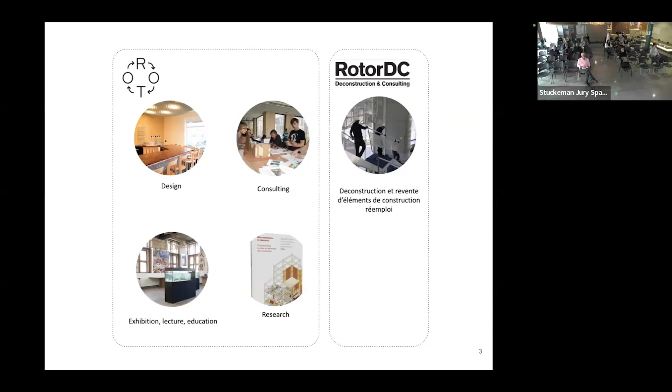I'm going to show you a few examples of projects dealing with the question of circularity and obsolescence in architecture. But first, I would like to go back in the past to introduce you to the history of reuse.

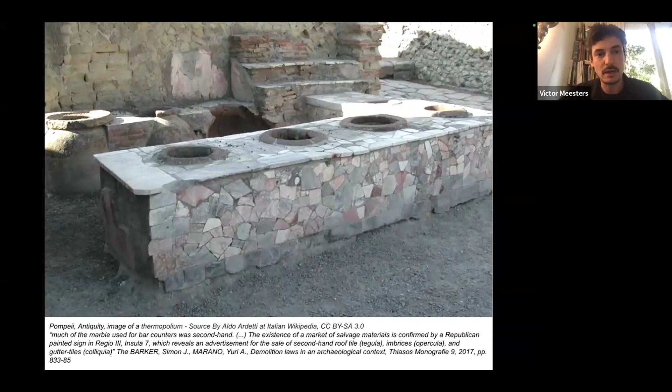We found in archaeology sites, like in Pompeii, some examples of reuse in history, like this counter, which was made with marbles coming from a demolition site. We also find advertising for selling second-hand roof tiles on this site, proving that there was an existing market of reused building elements.

When we are thinking about demolition, we all have this image in our mind - the demolition in Saint Louis, Missouri, Pruitt-Igoe, which you all know in architecture as famous for the end of modernism. This practice of demolition makes impossible the reuse of building elements.

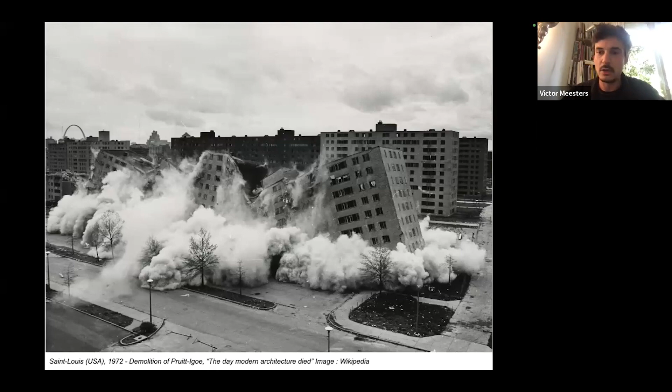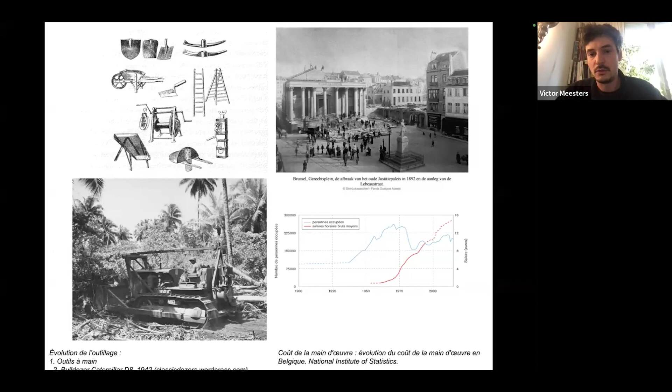The question is what happens between Pruitt-Igoe and this reclamation yard, in this time where we are not able to collect salvage materials. There are a few reasons: the evolution of tools, of course. At the time of Achille Picard we were using hand tools, and after the two World Wars we developed machines that can go faster. But also the evolution of wages, because reuse practice is 100% labor-based local workforce. With the evolution of wages, the price of materials became lower than the price of people, making it difficult to reclaim building elements.

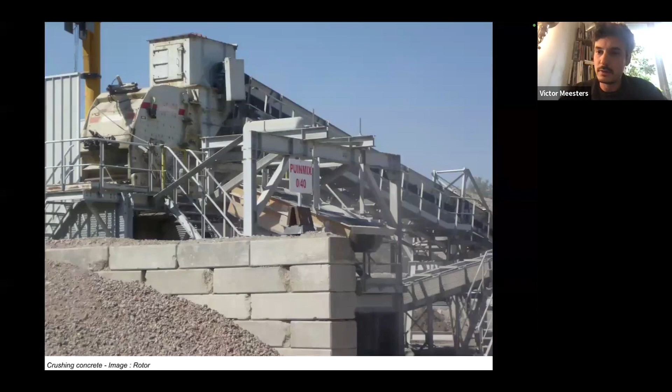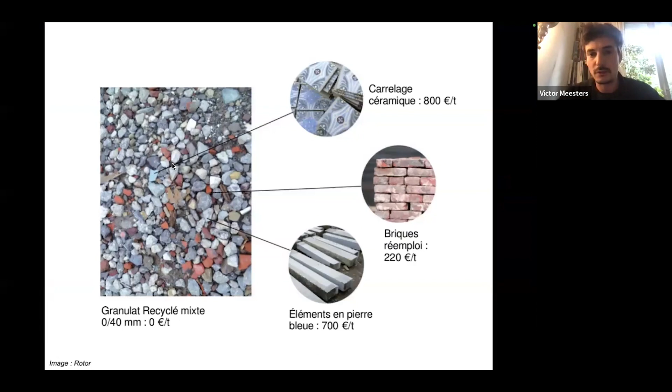But we all know how disappointing the recycling practice can be, with the great loss of energy and money embedded in this material. These are the crushed materials, but you can see fragments of ceramic tiles, bricks, or stones that could be sold at a higher price on the second-hand market.

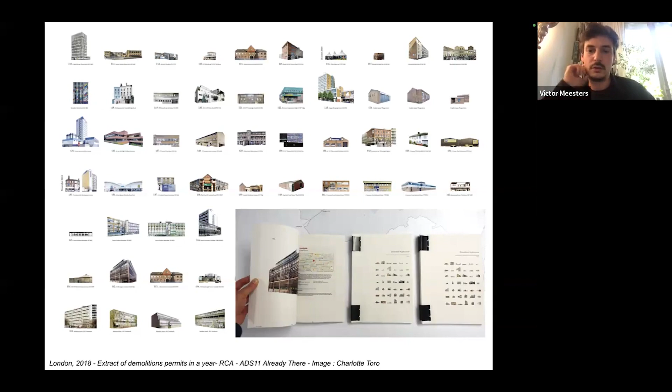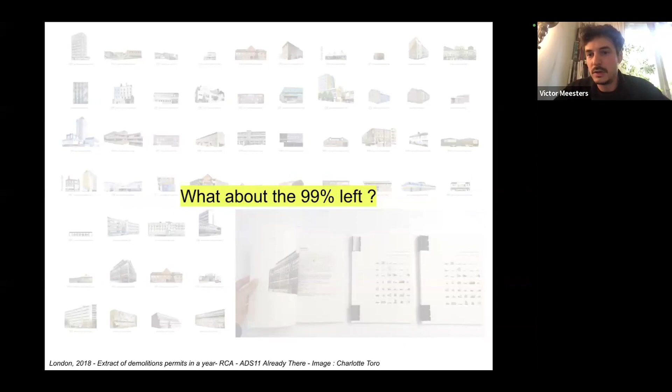Every day we have thousands of demolitions in cities. This is an image from one of our students in London who tried to visit every building with a demolition permit in a year. We found that less than 1% of building elements are reused following their first application. So the question is: what about the other 99%?

To start this lecture, I have a small gymnastic exercise for you to interrogate our habits. It's an exercise I stole from Dennis Meadows when he came to Paris. So I will ask all of you to put your hands on your legs.

Now cross your hands like that. I hope you can see me. Now uncross your hands and try to cross them the other way, in reverse. What do you notice? Is it easy? Is it natural? I think you just experienced what it is to change your habits, and the sensation you have in your body could be the same sensation when you want to change your way of building, of building architecture.

You can experiment how difficult it is to build with second-hand materials in a world made for new materials. At Rotor, we try to cross the hands in two ways, and I'm going to show you a few projects that might make it easier to change your habits.

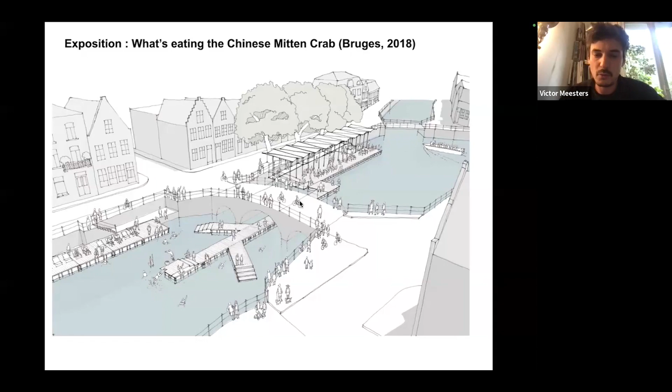When we took it out from the water, we found crabs under this deck. We asked the administration, what are these crabs? And they said, that's waste - you have in front of you a waste. It's an invasive species coming from China, and they used to destroy these little animals because they have no place in this canal of Bruges.

We were interested by this waste, by these crabs, and we started to interrogate them - to look at where they are born, where they live, comparing the Yangtze River, where they come from, to the canal, and find some similarities. We made small curiosity cabinets to interrogate the flow of these crabs and where they're coming from in China.

We discovered that in China, it's a precious meal - they are cooked by famous chefs, and people really like it. So we asked a Belgian cook, would you be able to cook these crabs, which is to cook this waste, in fact, because they are treated as waste. The project was to finally design a small restaurant on the beach and invite Belgian chefs to cook the crabs we collected on the shore.

So it's a delicious waste meal. Another small lesson is changing the perception of the existing instead of changing the materiality. If you can keep the materiality on site but change the perception of it, that's the first goal for circularity.

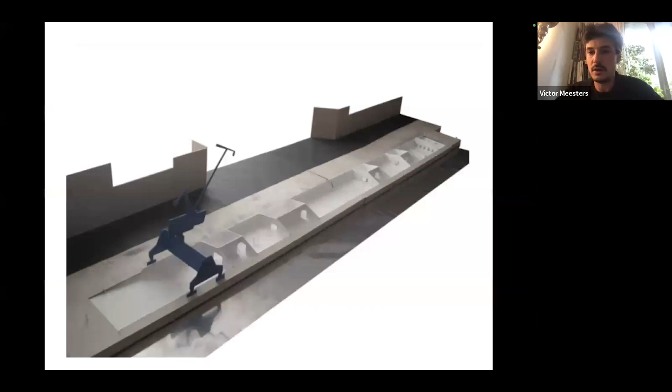This is a project in Ghent, Belgium. The city wanted to transform this former industrial harbor into a public space, and the architect proposed to paint this new space white. We were invited as artists to do a 1% artistic action on this project, so we asked the architect before painting, can we have a look at the marks of this space? We found a lot of marks, proving there were marks here because of the collection of certain materials.

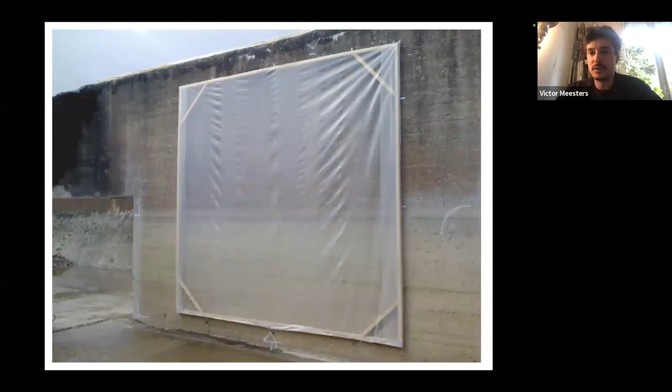We found it interesting to keep some marks that were here because of the past use of this building. There were some graffiti works, and also nice textures from the decoloration of the concrete, because cement was stored at this place. So by protecting some pieces of the history of this building, instead of creating only a public space, we created an art gallery with fewer materials than expected.

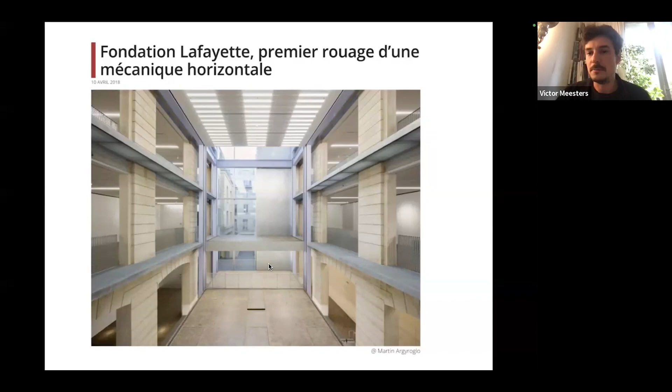Another lesson that could seem obvious: instead of throwing away a material or a space, could you find a new use for it? We are in Paris, at the Galeries Lafayette, the famous shop, which wanted to open an art foundation in this building. They asked Rem Koolhaas, the famous OMA architect, to do the renovation works. But before this construction, they needed to close the building and start some reflection about their project, so they asked us to do a scenography before closing the building, to host lectures.

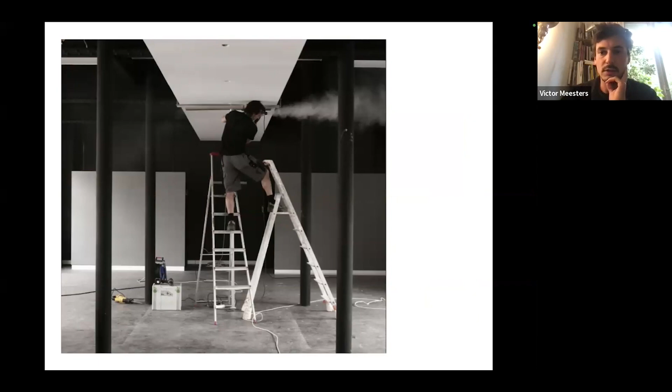Instead of doing just a scenography, we proposed to open the space 4 years before the foundation opened, for the same price as the scenography. We had this banal space, like classrooms, so we proposed to raise the ceiling a bit to collect natural light and create a workshop for artists. We cut the walls to make a big space to gather people, and we needed a space to eat together around a table, so we dismantled the hanging ceiling and transformed it into a table.

Another lesson from circularity is working on modularity and reversibility, because it makes it easier to reuse building elements. This time we are in Ostend, Belgium, where this museum, Mu.ZEE, asked us to renovate the space because they were a bit stuck with this obsolete setup. As you can see, this wall was covering the natural light.

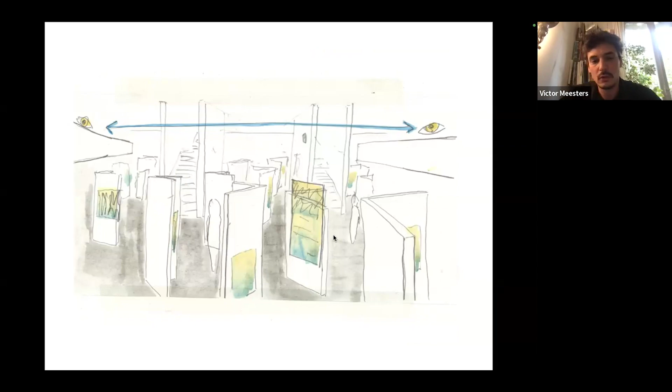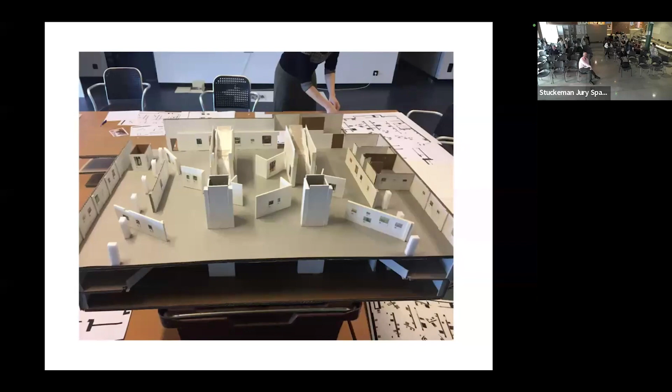So what we proposed was to cut this MDF wall and create some modular exhibition sets, and by doing so, recreate an understanding of the space. We made this model to show them all the possibilities with this MDF, and we started cutting the wall. In the end, with no new materials, with what they already had there, we created this set for the exhibitions.

With scraps, it could also seem obvious to use the leftovers of your production. With this project we had a lot of MDF scraps, and at the same time another art center asked us to do the entrance pavilion for their art gallery, now housed in an old church. We were dismounting these MDF panels from the museum scenography set, and we had all these scraps and leftovers.

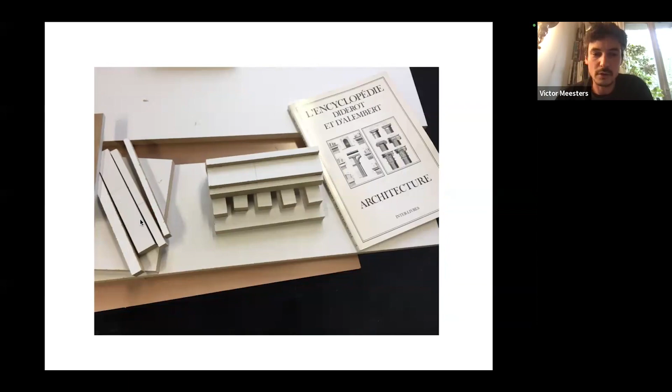But looking again at our classic design, it reminded us of some classic architecture that could fit well in this church. So we collected all the scraps from this demolition and deconstruction work and designed this modest pavilion entrance shop. This is a 100% reuse pavilion — we didn't paint it, we just used the raw material, the raw leftovers.

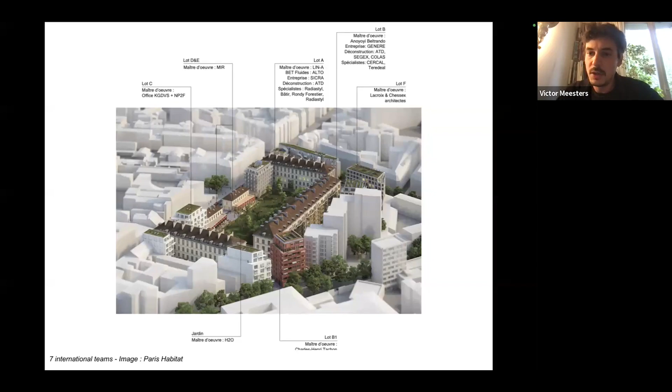So there was an international competition with 7 international architecture teams, and we, as ROTOR, needed to provide them with reuse elements. So we started to do a reclamation audit in the building.

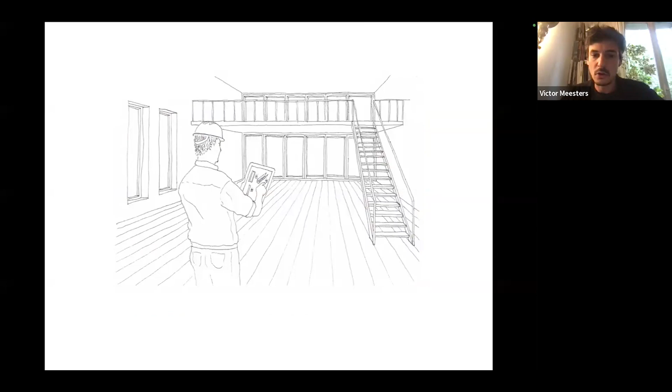A reclamation audit is not just listing every material that you can dismantle. It's more, you need to take into account the phasing of the project, the pollution, the quantity of the material, the quality of the material, the wear, many options that can make possible or not the reuse of a building element.

So you have in front of you one of our tools that we are using daily, this inventory. On the left part, you have the list of the materials like wooden floors, slates, or cast iron radiators. These are the easiest ones to reuse because we know there are reuse activities existing for collecting these materials.

And then a second batch of elements where there is no reuse industry linked to these materials, like this wooden cupboard, or railings, but they are in good condition and good quantities.

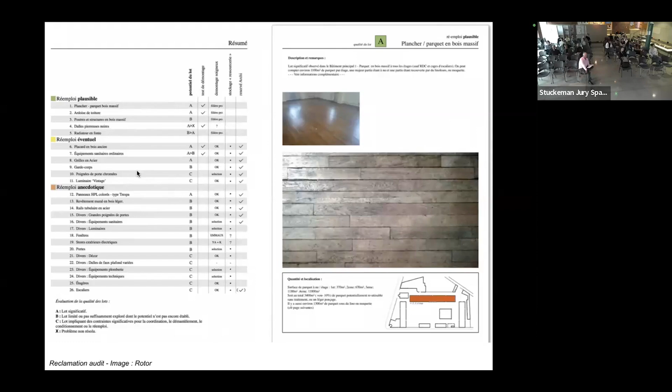And on the right parts, you can see like a regular sheet where you find the pictures of the room and the details, and where the quantity is.

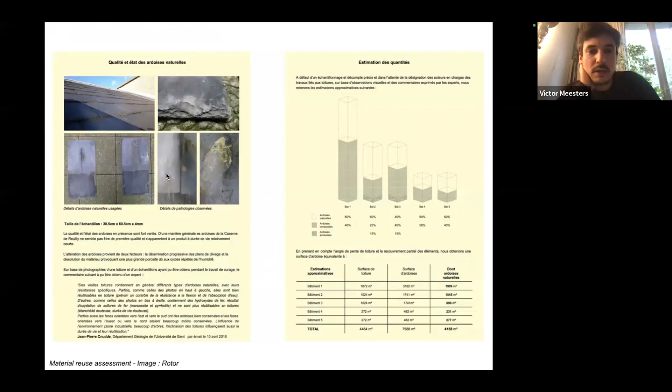Sometimes you need to study the materials more before you want to reclaim them, like this slate on the roof. Finally, they were in bad condition because there were marks of rust on the ironed part of the slate.

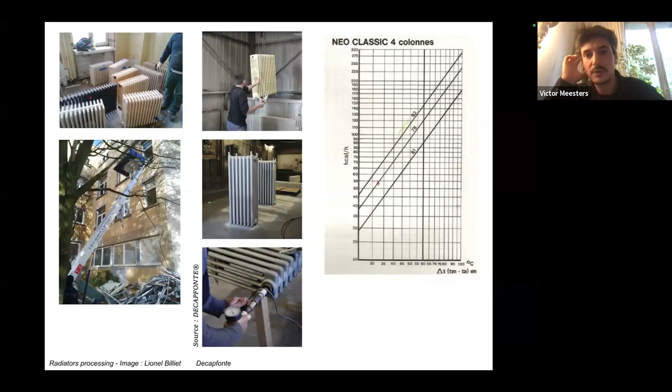And also, doing the inventory needs some research in the archives, and we found the catalog of these cast iron radiators, which makes it possible to adapt these old radiators to the new boiler.

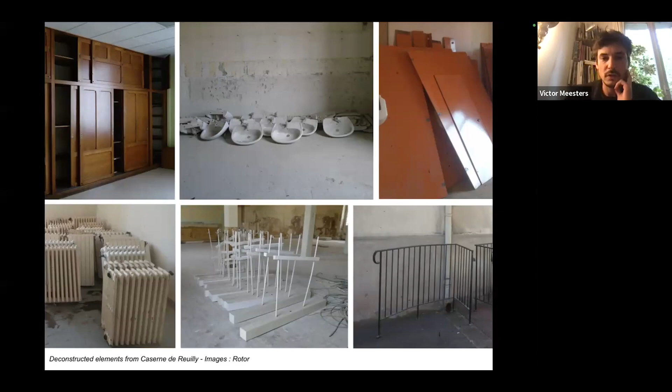Of course, you also need to repair. So this is another small lesson with all these materials on this former military base camp: we needed to clean them. So this cupboard needed to be sanded.

So we tried many ways to sand, by chemical processes or sanding with a machine, and adapt this old cupboard to the new furniture.

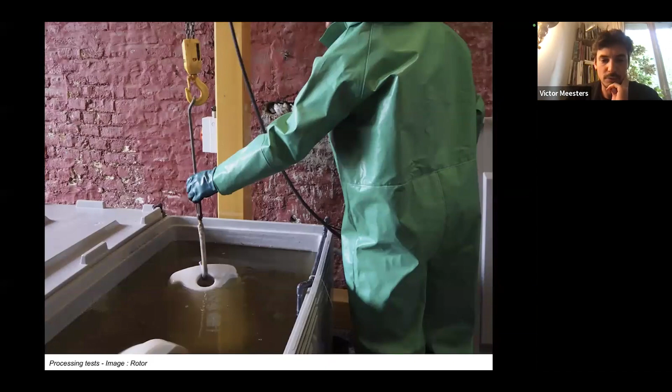The basins were washed and poured in a vinegar bath and cleaned, and the lamps were relamped with LED, a new system, rewired.

But sometimes you don't have a use for this element and you need to find a new use. So this is also a small lesson: you sometimes need to be creative, like for these panels from the toilets of the army.

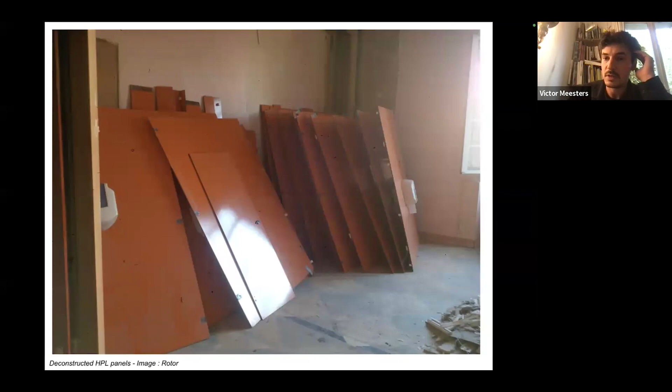This is HPL, high pressure laminated panels. They have super resistance to a large number of chemical products and high temperature. So we decided to design a new stool and send it to the CNC machine.

So these panels make the new furniture of this cafeteria. We discovered that we had some cobblestones that we cut in two parts, so we can have a part for disabled persons and one for rain to collect.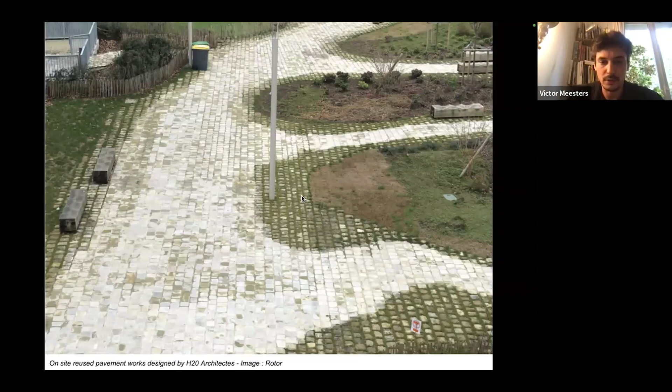There were some railings, and we cut the rails to create some urban furniture for the project.

Another lesson in circularity is to cultivate your networks, because you need to have a view on what is already existing or freeing up from the demolition of the city.

So this is a project for a bookshop in Brussels, a bookshop that has every book in 13 languages. It's close to the European Parliament. And he wanted to invest 100% of this money on local workforces and no new materials. So we proposed to renovate the space this way.

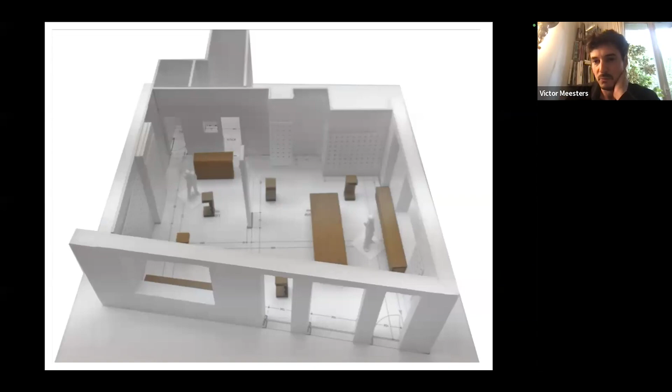We created a white model because we didn't know the materiality of the furniture we were going to collect. And then we started to look for materials. But at the same time, we opened a construction company in Brussels and started collecting building elements from various places.

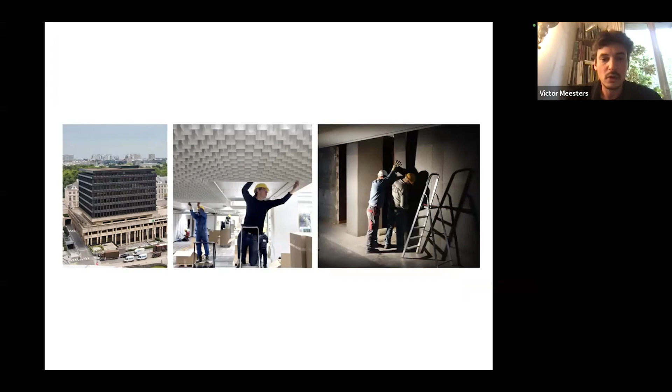So it was quite easy to renovate this space with second-hand materials, and you wouldn't even notice that they are not new.

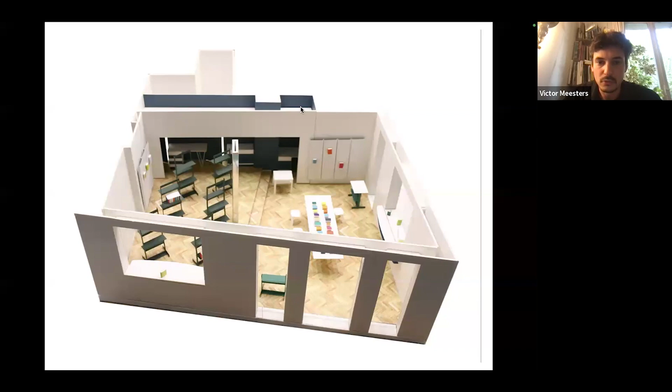But there was a tricky part, like this opening that we did, and we needed a wallpaper to cover this space. And we didn't find a second-hand wallpaper, so we were selecting new ones.

But one night, one of our colleagues, who is friends with the scenographer of the theater La Monnaie in Brussels, spent some time with them, and they told us that they stock in containers a lot of theater sets that are no longer used.

So we asked them if we could borrow one of them, and they agreed to come and install the best second-hand wallpaper that you could ever have.

And the last small lesson is doing the state of the art of existing practice, because as ROTOR we're able to reuse materials on site to design and build a project. But what about other architects? Is there any existing reuse company? So we started to look at the countryside, where the land is cheap.

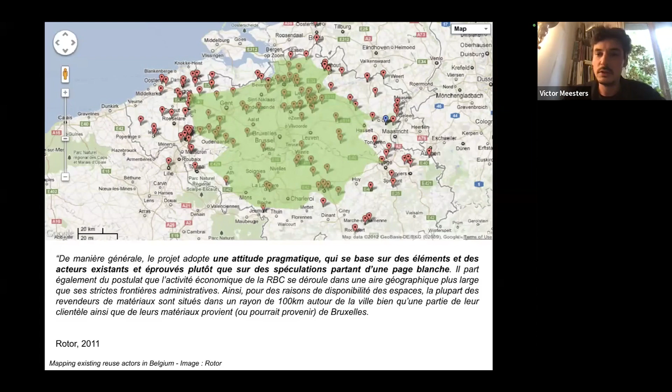And we found some reclamation yards, reuse dealers, antiquity dealers. Every part of Europe has its own reuse dealer. It's not the green revolution 2.0 you'd expect. It's more like companies that don't talk about reuse, but more about authenticity, celebrating the patina of the materials.

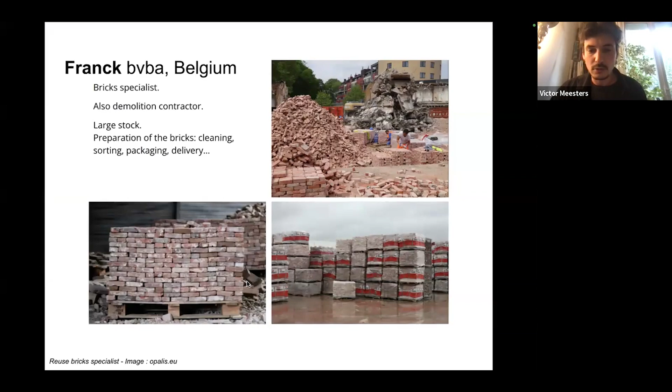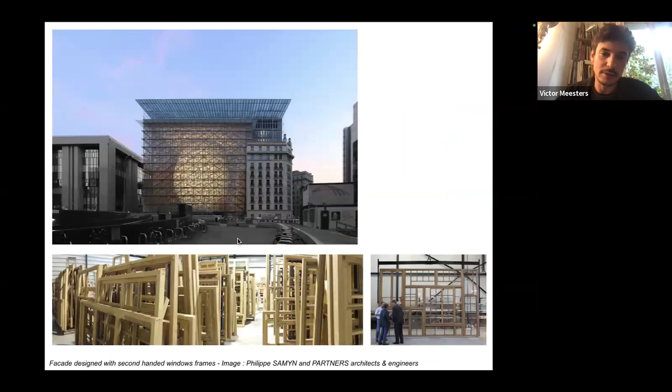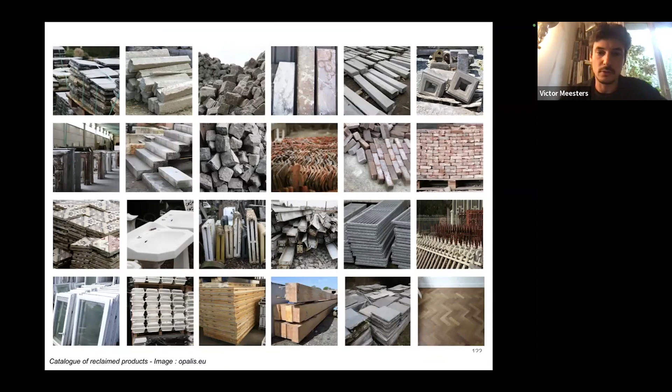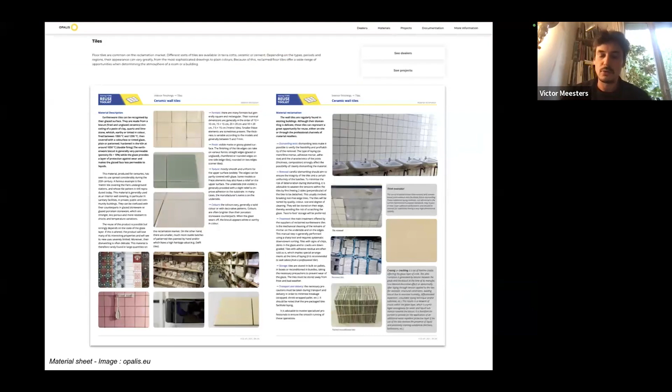And we discovered, by doing this state of the art, that we have the first catalog of second-hand materials available in Northwest Europe. So we decided to do an online directory to give this information to every architect in Europe, with examples of projects, and to develop tools, specifications, and guidance manuals to help designers implement or extract second-hand elements in projects.

So you can find this directory on opalis.eu for Northwestern Europe, and SalvoWeb for the UK. So now I'll let Margot continue the presentation. Margot, please tell me when I have to switch to the next slide.

Yes, thank you, Victor. So from that research of professional dealers, it appears, as Victor said, that many of the resellers were based in the countryside, where land is quite cheap, and also they were mainly focused on traditional materials. Mainly because it's easier to dismantle, the economical value is quite high, and there's a real issue of historical preservation in Europe for those materials.

So when we understood this context, we wanted to understand if it was possible to have a similar business model, but in a quite dense urban area, and with modern materials. So we started to experiment with logistics applied to contemporary building elements.

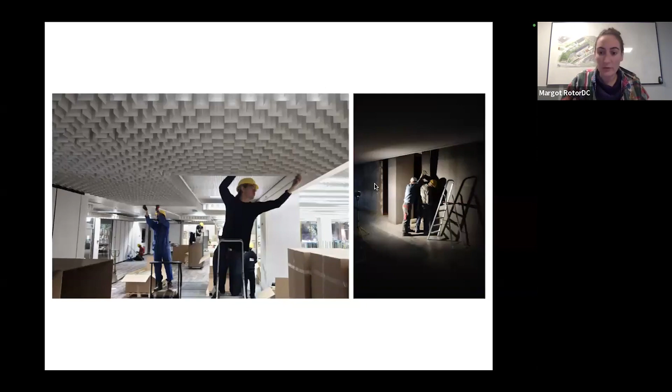And as you can see in the photos, it was mainly really simple tools and labor work. So things didn't really change since the last century. The thing is, we understood those materials were super qualitative, and it was interesting to preserve them as much as possible.

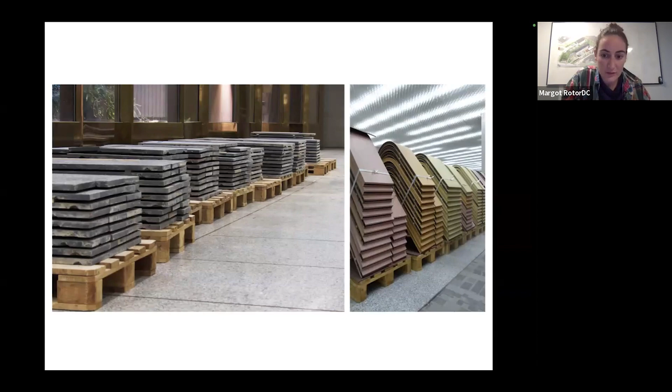So you can go to the next slide, sorry. We palletized every material depending on their specificities. But from that, we had to organize their transport and storage. So the real challenge started after the dismantling. We were in front of a large amount of materials, but what's next? What was the next step?

How to be able to reintegrate them into contemporary projects? So in 2016, ROTOR DC was founded as a spin-off of ROTOR ASBL, the non-profit organization, and the goal was not only to find new projects for the dismantled building elements, but also to show and convince that it was possible to have a real business model.

An economical balance thanks to the selling of these materials. Because if you show that it's possible to have an economical model where you can make a profit and create local work and local jobs, it means those materials have value, and you can continue to develop the practice of reuse by using powerful political and economical tools.

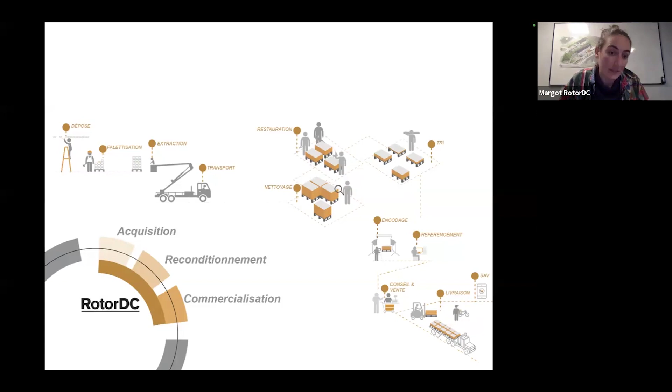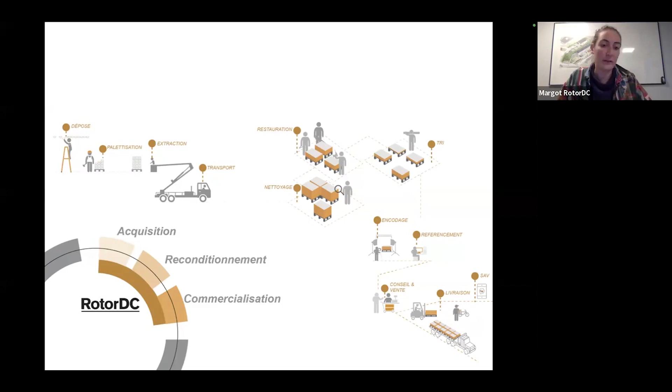To treat and reclaim all those materials, we are now a team of 20 people working 6 days out of 7 in our place, divided into 3 teams, each one important to provide our customers materials ready to be reused and installed again. The first one, sorry the slides are in French, is what we call the acquisition team, in charge of organizing the dismantling of materials.

We always adapt our operation to the place, because every context is singular, and that's why we need a lot of workers - most of the time we cannot bring a huge machine into places about to be rehabilitated or demolished. So on site, we also try to palletize and make the operation as easy as possible to be transported to our warehouse.

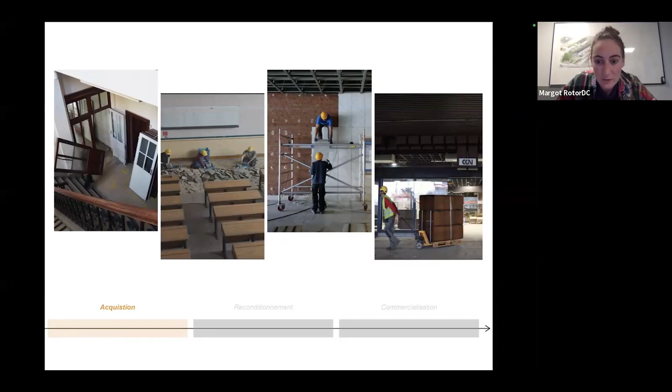If we go to the next slide, Victor, we can see that on site, when the materials arrive, they're going to be treated and processed in order to be as close as possible to a new material. Here you can see the process for the ceramic tiles. First the tiles are dismantled on site, packed in blue boxes, and when they arrive in our warehouse there are three possibilities to clean and rehabilitate them.

The first one is to remove the mortar manually with a pneumatic tool, but it's super hard, super physical, and super long. The second one is dedicated to the ceramic tiles - we dissolve the mortar in chemical baths, and then clean the rest with high pressure water jets. But this process is impossible to use for cement tiles.

So we also developed a new machine able to remove the mortar from the tile in a mechanical process, like that. We can now also process cement tiles and terracotta tiles. The idea for ROTOR DC is always to improve and go further in reconditioning the materials - we do not sell materials as they were dismantled. We always want to make the reinstallation of the materials as easy as possible, and for that we also developed a whole reconditioning process for the lightings.

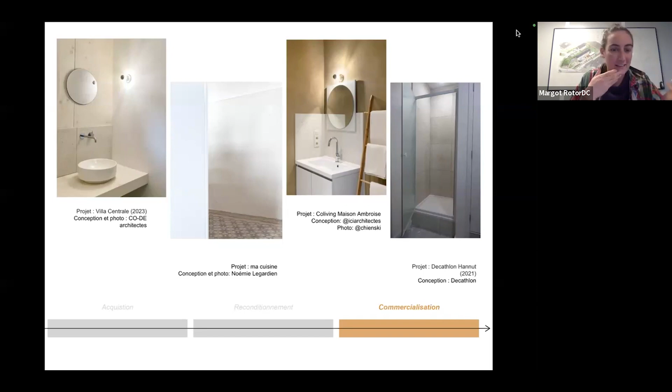Reuse, as a practice, is also a way to strengthen the dialogue and interactions between the builder, the designer, the owner, and also the material trader. I think nowadays it's especially important to keep this human relationship in architecture. Each person is important in the chain and in the network.

So we are an articulation between the offer of materials available because of demolition and rehabilitation projects, and professionals who design and rehabilitate places. And that brings us to the last point, maybe one of the most important when we talk about how to design with salvaged building elements: the need to design with flexibility.

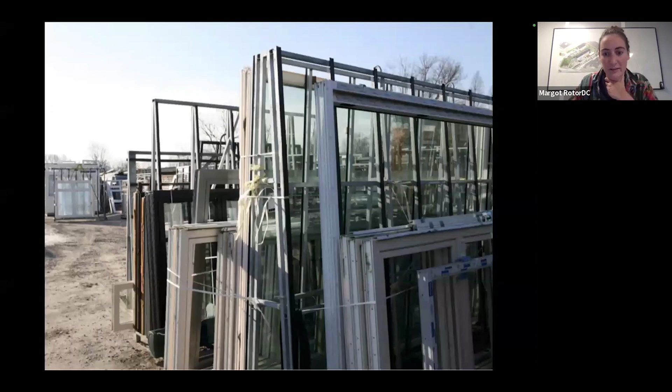So here we had to design a facade, and the first thing we wanted to look for was the materials themselves. We went to resellers and asked about the windows they had in stock, and started an inventory of the windows available on the market. From that document, we also started to design, to draw a pattern of a facade with the minimum dimensions of each opening and the maximum dimension of that opening on the facade.

So it means we didn't really know which window we were going to use, but we would know more or less how big it could be on the facade.

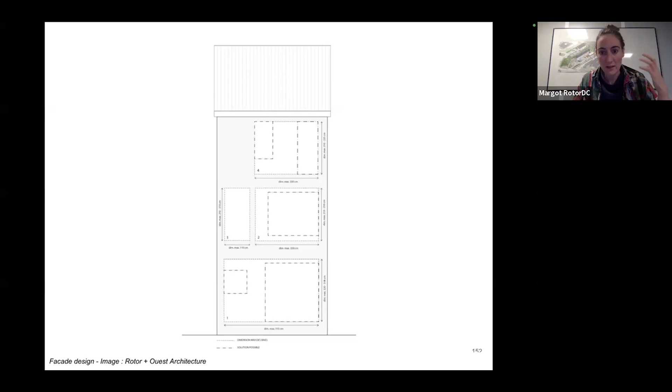And those windows would have to check and validate some characteristics. For instance, the energy and thermal efficiency of those windows was super important, as well as the homogeneity of the batch for all the openings, which was also a big issue.

But in the end, the architects and ROTOR were quite flexible, and the owner was also quite flexible on the colors of each opening.

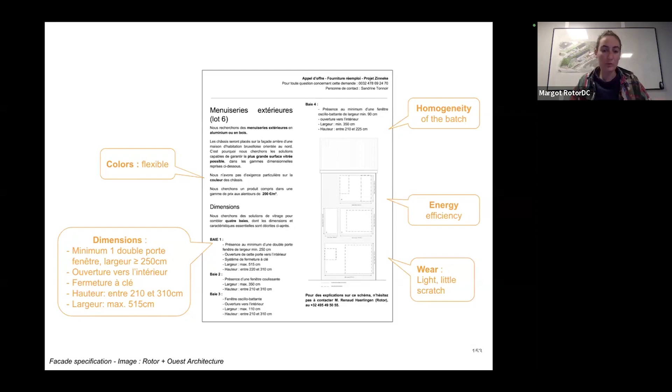So the idea was really to show up the most important characteristics, and which ones were manageable and which were quite easy to be changed depending on the windows available on the market.

It was a lucky coincidence that at that time the windows with a rounded finishing were on the market, and they just decided to reverse it in order to give a new sense to that characteristic, which was mainly to deal with structural needs in a former project.

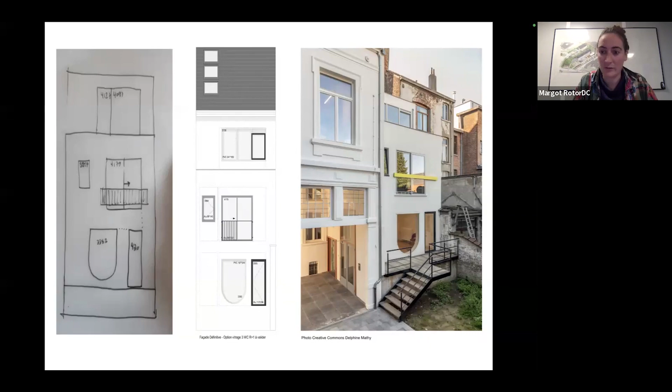So maybe that's the idea we need to keep in mind, that we need to change our habits, but it can be super positive for the aesthetic and also for the environmental impacts of architecture nowadays. Thank you.

Questions, anyone? Go ahead, yes. Est-ce que vous m'entendez? Oui. Merci pour cette présentation, c'est super. Je continue en anglais pour mes collègues.

I think this is really amazing. I just had a question, an example came to mind, which is La Tour Montparnasse in Paris. They won the competition because a collaborator proposed that they reuse the windows to make furniture with it. And I think what's amazing with this type of project is that Europe is really pushing for these types of projects.

But my question was related to, in this building, you also had materials that needed to be taken away because of harmful off-gassing, or they were not good for your health. I'm just wondering how much of that you're taking into account. PVC is not healthy for the environment, it's off-gassing, other materials are really not good. So how do you actually take that into account? Is there something you're taking into account? I know it's recovered as a material, but not all materials are good for your health, and not in the new buildings, especially in the US, for example, they're just plastic buildings, not good materials. So what do you do when you don't have enough of these old good types of buildings that provide you with materials?